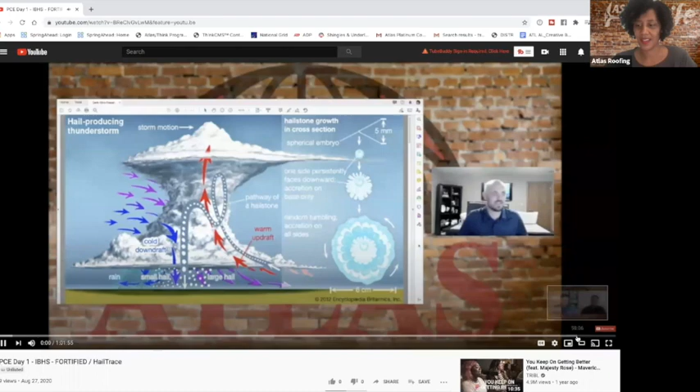Thank you very much. It's definitely something that I'm pretty passionate about. A lot of people come into this industry typically starting on the roofing side, and like you said, I didn't come that way. I'm a weather nerd. I love weather more than anything. In fact, I don't really like roofing all that much. But I've gotten really interested in what weather does to roofs, which has been a really interesting aspect for me.

And as I've dealt with contractors and insurance companies and adjusters and learned what all these different areas of the industry go through, we've learned that the weather is not just cut and dry. It doesn't just happen to one roof or the other. And so we started trying to figure out why is that? Why is one roof damaged and not the one next door to it? There's just so many different variables that go into weather and how it impacts roofs.

And so that has become very interesting to me, to the point that, you talked about me being a storm chaser, I actually have a truck that we drive out into storms with a roof in the back, just so we can video what happens to that roof. And so it's very interesting to me, and it's something that is really exciting.

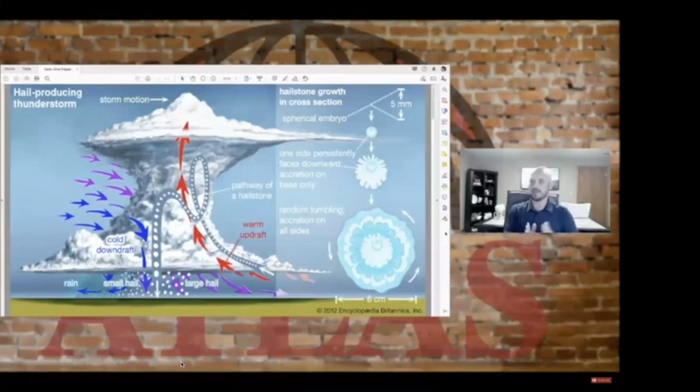Sometimes bigger ones go into other bigger ones, and they form these bigger hailstones, and they stay up in that cloud until they get too heavy, and then they fall out. You can see where the hailstone just gets bigger and bigger, and then eventually it falls out. What's nice to know, when you're looking at radar and analyzing a thunderstorm, is where does that bigger hail fall out? Typically it's underneath the updraft. So it's right next to the updraft. You can kind of see it in that picture, right on the line right there.

Now on radar, that's going to look a little bit different. You're going to see some different things, and we can actually see the tilt in the way it might look on radar. As we go to the next slide, you'll be able to see what that looks like and what we're able to analyze. As you can see, it kind of looks like a big blob on radar. The pink is typically the area where you're going to see a lot of hail. This is actually a storm in the Denver area, and this is data that we use to analyze these thunderstorms. It's called dual pol radar.

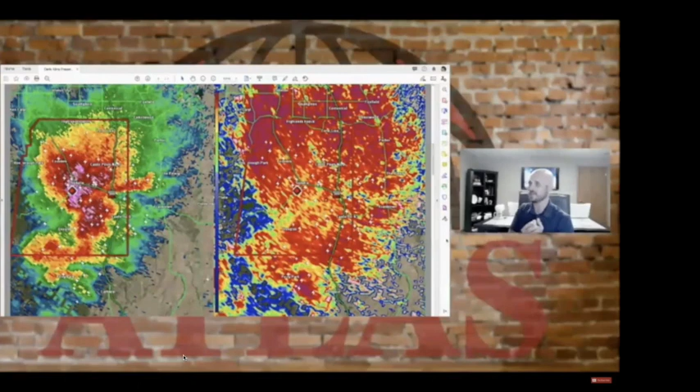But we want to see that heavy precipitation get up into that 15 to 25,000 foot range. That's where we really make hail. But then that tilt is actually going to circle that back around to the backside, and it's going to fall out near the updraft. So even though the circulation of that storm is going to pull the hail over the top of somebody, it doesn't mean it's actually going to fall until it gets back here by the updraft. And that's where it's important for us.

And one of the reasons why we use meteorologists is because we can analyze a storm and get an idea of where that updraft is, so we can accurately depict where the biggest hail is falling. Now, the biggest hail, and that's kind of the problem that we're going to talk a little bit more about, is not always exactly what you're looking for. There are so many different variables in a storm that we don't want to focus on just big hail.

So we want to focus on the volume of hail. We want to focus on the duration. How long did it hail for? We want to talk about the density of the hail. Was it hard or was it soft? And then we can start talking about the different types of roofing materials too, because those play a huge role in how damaging a hailstorm is.

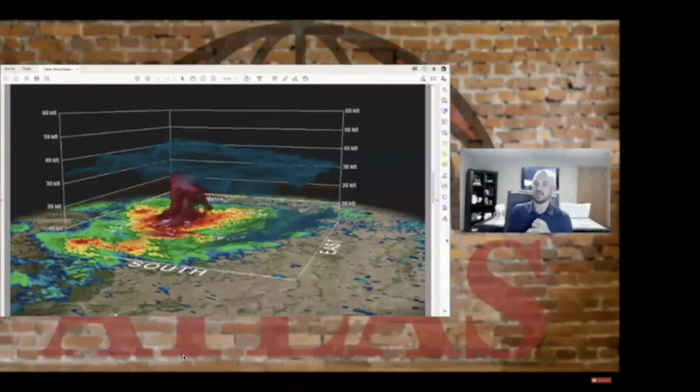And so there are a lot of variables that can go into that. Some of that could be duration. Some of that could be, again, the hail size plays a role. That's just one of the pieces though. What about other storms? I think that's something that gets left out. So it could be that there are other storms that have caused there to be an issue. So maybe this neighborhood was impacted with a storm 5 years ago, and some of the roofs were replaced and some of them weren't. That could play a role.

Maybe some of them have 3-tab roofs, some of them have impact resistant shingles. Maybe some of them have Atlas shingles, so they're better roofs, right? So there are different things that can determine whether or not that property has damage. And so if we can get to the point where we stop focusing on a singular swath and saying, this is yes or no, this is what caused the damage that we found, and start putting ourselves in a position where we objectively look at these roofs and we say, all right, this is a 5-year-old roof. This is the shingle that it has.

One of the things that we saw, this was in Yukon, Oklahoma, that was really, really neat. So we talked to a contractor that had installed a roof on one day, and one on the very next day. It was in a cul-de-sac, and the storm hit 2 years after they installed the roof. And this storm had some fairly large hail. It was like 2.5 inch, but it was fairly isolated. So the volume of hail was low, but we did have some size to the hail. So potential that we could have totaled a roof off of this storm, but it wasn't 100%.

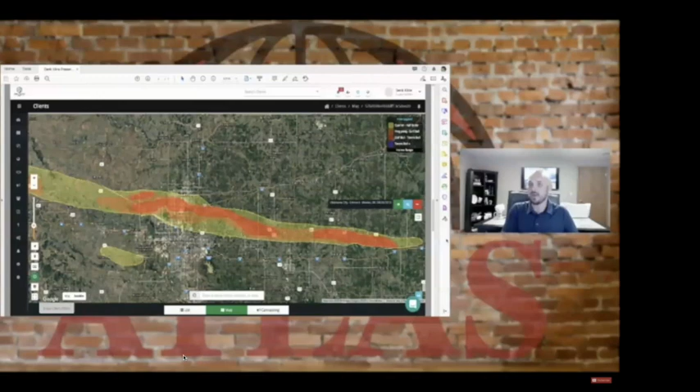And so as a contractor, I can pay attention to that and understand the value of that storm because I have the ability to tell the story of that storm. And so we have to learn to look at these storms and these roofs for what it is that caused them. And so it could be a history of weather that's impacted them. You might look at it that there was a storm 5 years ago that had 1.75 inch hail that was maybe low volume. So maybe that gave it, let's say, a 20% chance that a roof, so 2 out of 10 roofs, are going to be totaled because of the volume.

Then you have a storm that did 0.75 inch or maybe quarter size hail, but had a higher volume. So maybe that gave it a 30% chance of being totaled. And then we had another 1 inch with isolated, and that didn't do quite as much to it. And then we had a 2-inch hailstorm that maybe was a lot of hail, and so maybe that totaled it out. Or maybe it was a combination of the first 3 storms, right? Each storm adds volume of hail to it, so it's not like the storm before didn't impact it.

So if a roof was impacted with 10 golf ball size hailstones 3 years ago, and then 2 years ago it was impacted with 5 more, and then 3 years later it was impacted with 6 more, and then 7 more, and then 2 more, all of a sudden it's compiling up. So the damage doesn't just happen always with one storm. It can be an added value where it's basically adding in storm after storm after storm, and that's what's causing the roof to be totaled.

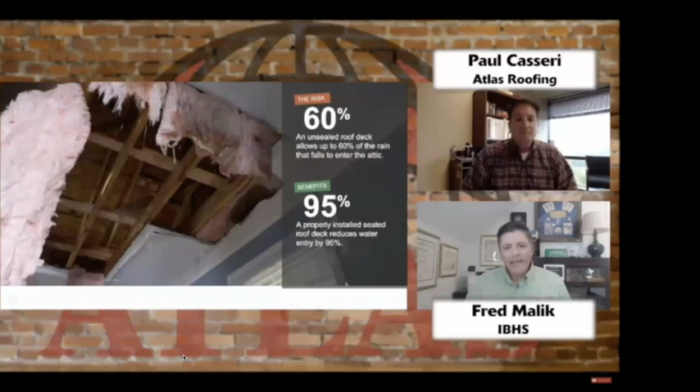And on top of that, when a roof gets damaged and the cover gets damaged, then you allow access of wind and rain to that deck that sits below it, especially if you're not using a real durable underlayment. Once that deck gets exposed, that water pours in there. So 60% of the water that hits an exposed roof deck is going in the house. But a sealed roof deck, an enhanced underlayment system, can repel as much as 95% of that water, keeping the damage to the outside, letting the family stay inside and keep using their house.

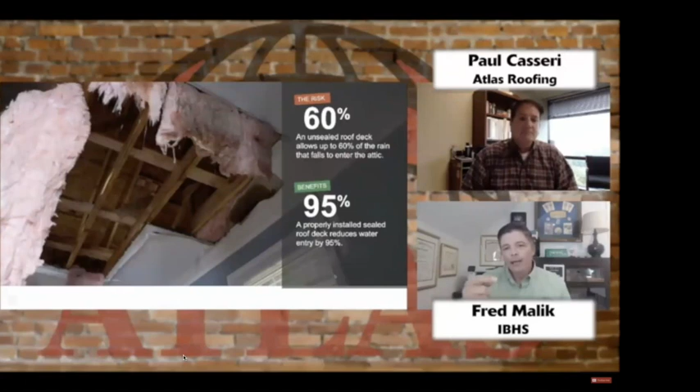And let's go even a step further and put some dollar signs to it. If you have a fortified roof, or a storm-resistant roof, you can reduce potential losses by as much as 300%. And what a critical role the roofer plays. I'm not telling you anything you don't already know. I'm not telling you anything that Atlas doesn't probably spend a lot of time and energy telling you, how important you are as a trade and as somebody who provides a valuable service to your customers.

That system that's protecting all of their contents and everything that they hold dear on the inside of their house is under attack 365 days a year, 7 days a week. And if it can resist those extreme forces and keep the damage to a manageable area, we can keep people in their homes, and we can really keep that loss from being amplified unnecessarily.

And one of the other challenges that we face, in addition to the economics of loss, is that people like me, I've been a contractor for an awful long time. I just need people to tell me what the right thing is to do. I prefer that it be based on science and data, and this is all good stuff. But the current testing for impact-rated shingles, for example, is based on a steel ball. And I don't think we heard anything in Derek's presentation that there's a natural phenomenon of steel balls falling out of the sky and causing damage to roofs, right? There's certainly a lot at play there.

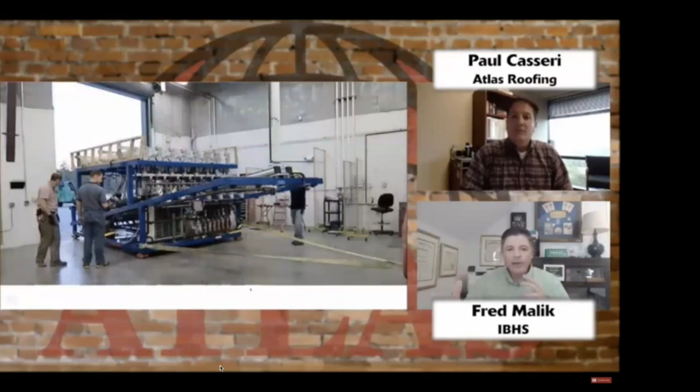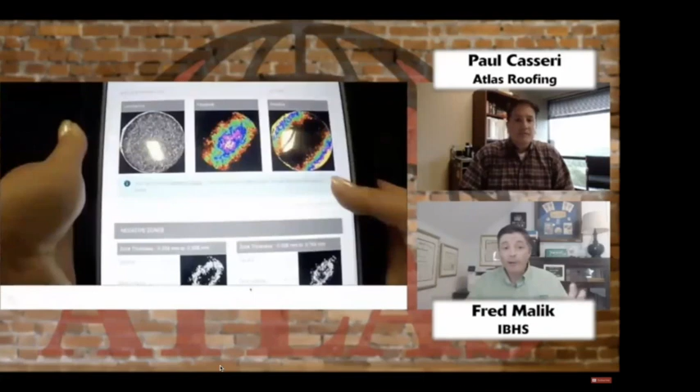You see us collecting some of that hail that Derek loves to chase around, and we can 3D measure it and 3D map it, and then we can bring that back and use this machine here to create hail, and then we can shoot it and look at the different types of impacts. Believe it or not, there's a big difference between hard impacts and soft impacts, and there's dents and ridges. Ultimately, what we've been able to do is create a more realistic test. That's the IBHS impact resistance test.

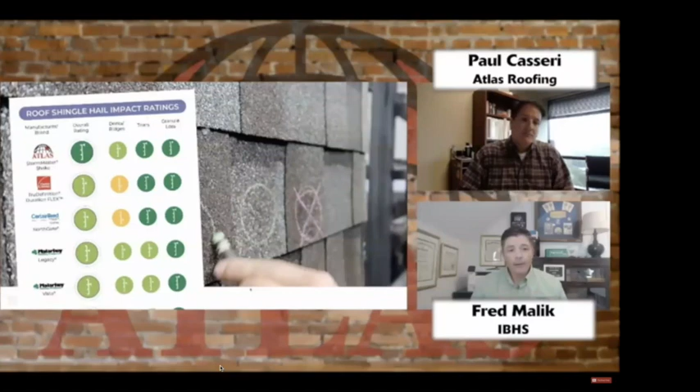And we tested IR shingles that are available on the market, and lo and behold, Atlas finished at the top of the rankings, looking at characteristics that actually translate into what the homeowner experiences and what you as a roofing contractor may see in the field. And so this is a perfect example of how IBHS takes science and research, develops something useful out of it, and then we have to have some place for that research to land so people can do something with it. So if we can go ahead on to the next thing.

And what we're trying to figure out is a way to help contractors like those of you who are here today help your customers make sense out of something that's really confusing. When people are getting ready to buy a roof, this is what it feels like. Feels like a 50-lane highway that's got all kinds of circles and off ramps and on ramps, and they're really looking for experts to guide them through the product selection that's appropriate to them and help them sift through all the different things that are out there.

So you guys and gals, as qualified and knowledgeable expert contractors, can take that and change that experience for your customers into one that looks like this. So let's go ahead and click on to the next one.

A straight and level path, right? A clear path to success, right? And how do we get there? Well, your experience will help get you there, but also taking advantage of a voluntary program like Fortified. So I mentioned the research that goes on in our research center. That ultimately finds its way into the Fortified set of standards. And Fortified is a voluntary program.

You can offer it at your discretion to your homeowners and your potential customers as a way of helping them address the concerns and the vulnerabilities that they have and the needs that they have. It's broken into 3 levels, and it starts with the roof. Every single Fortified home in the United States has a Fortified roof. Then it goes to Silver and Gold, each level adding additional levels of protection. But everything starts with the roof, and it can be really, really simple.

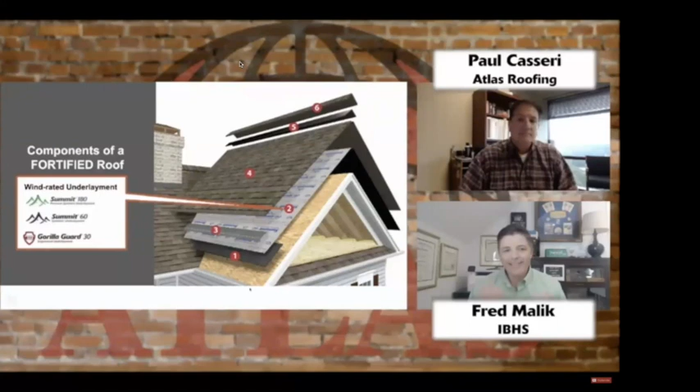You can combine systems. But if you choose to use a tape and underlayment system, you do have to put a tape down, but then you can choose one of Atlas's high-performing underlayments, like the synthetics or the heavier felts, ASTM D226 Type 2 level felts. They're more tear-resistant, and if you secure them using button cap nails, we've tested it to 130-mile-an-hour winds. They stay in place and they repel water for a good long time. So that's really a good quality choice that most of your customers won't appreciate unless you as an expert tell them the value of that. And that's a real opportunity for you guys to offer that kind of insight and knowledge to your customers. Be an expert.

The next thing that you've got to do is use a starter shingle. So a manufacturer-approved starter shingle that keeps that eave, that rake intact and down where it's seeing the highest pressures on the roof when the winds really blow. And then picking a good quality roof covering, a roof shingle, particularly if you're in a high wind and hail-prone area, picking that IR shingle, the StormMaster Slate or StormMaster Shake. Getting those products on the roof can really have a wonderful advantage for your customers.

And then, of course, in hurricane-prone areas in particular, now you heard Derek say that it's not just hurricane areas, but in hurricane areas, as far as Fortified goes, we do look at attic ventilation from the perspective of how effective is it at keeping wind-driven rain out of the roof, right? So as the wind drives the rain up the roof, if it's a ridge vent that's not prepared or not capable of repelling that water, it will just dump inside the attic. And so choosing a good quality attic ventilation product is also a critical decision, particularly in those coastal markets.

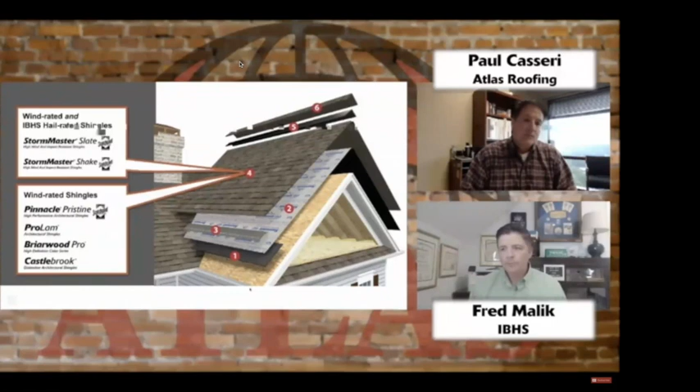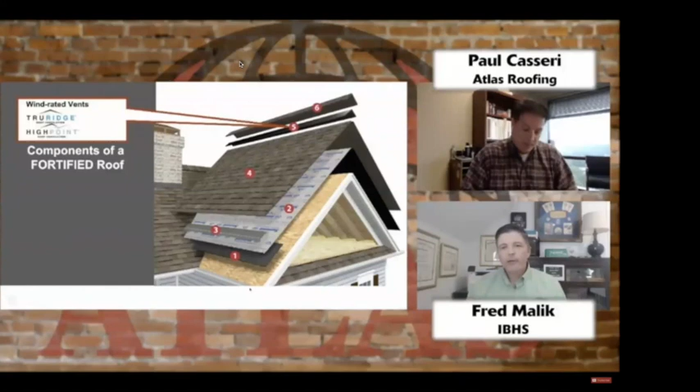And you can use that as a market differentiator. But the homeowner will call you and ask you for a fortified roof. If you come to terms on that, and you end up selling a fortified roof combined with all these great Atlas accessories and products, there is a requirement that you work with a third-party evaluator, and that third-party evaluator collects documentation, works with you. They're not designed to slow down your process.

They're there to help make sure that we document what you're doing that's different, that's going to set that roof apart. You can coordinate with them, tell them what your schedule is, help them collect the documentation they need, but ultimately they take that documentation and they send it up to us at IBHS. We review every file that gets submitted, and if it meets the requirements, we issue a designation certificate. That is delivered back out through you to your homeowner, so that they can then go unlock a whole bunch of different incentives, and we'll talk a bit more about that now.